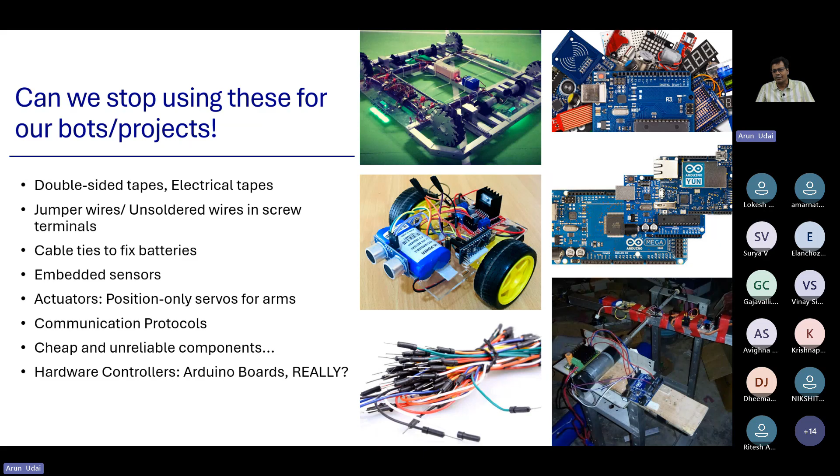Okay, so these are a few culprits. Hope you are listening, all of you are there. If a few of you can show me your face, it would be much better.

So where did you start basically, before UG? Before undergrad, where were you? Just check any nearby school level hobby competitions and science exhibitions - you were doing it before, right? Quite a lot of you. Hobby level science competitions and those exhibitions you all have attended, right?

So you see, even kids are making robots - in the front, what kind of sensor is this? This is ultrasonic sensor, yes very good. And then you have wheels, you have motors, right? And then you have a similar kind of maybe Arduino board or something. So that is a school kid who intends to make maybe an obstacle avoidance robot or a line follower, right?

That is very common at school level nowadays. If you go abroad, again you find Lego based line followers and kids play with that, right? Nearby at a science exhibition, I have been there as a judge and I saw there is a student in India - and there are many students who do this.

So this person is doing an exoskeleton, right? Links with the potentiometer joints. Joints have the potentiometer which can tell the feedback of how much angle that joint has turned. So each joint gives you the feedback of joint angle, and he can do forward kinematics or maybe using simple trigonometry he can find out where both his arms are, and he transferred those values to his motherboard which was an Arduino board, and then he had a motor driver on all the joints of the biped lying here, right? And that fellow used to replicate the motion that this fellow was doing, and this is a school project.

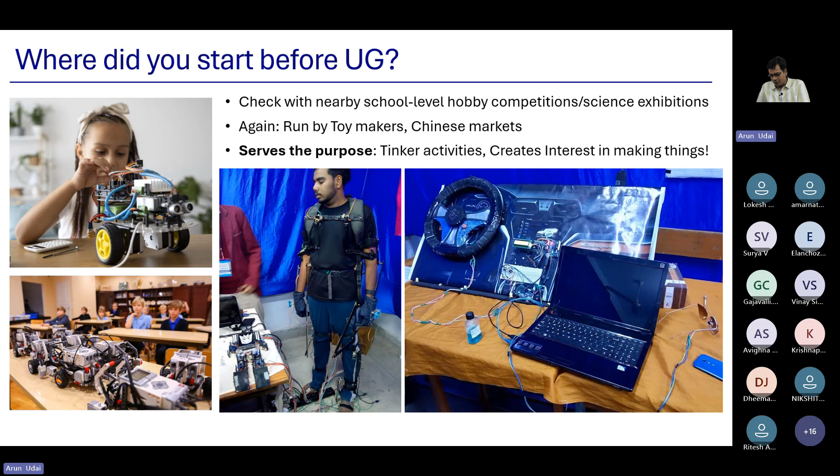Okay, so that is where we started before UG. It was good till school level. Don't claim that you are still doing UG level projects - definitely you are not, if you are doing this.

So these simple, clumsy bots - where does it lead to? These are all pictures from Robocon India, organized by Doordarshan. It's the biggest national level robotics competition organized. There are similar competitions organized by Technex at IIT Kanpur, Techkriti, Concetto at IIT Dhanbad, Srijan somewhere, and quite a lot of other technical fests. In all of them you've probably seen these kinds of bots.

Badminton playing robots, or soccer or basketball playing ones, and problem statements are given which favor certain outcomes. Actually these are all run by cheap Chinese businesses. The entire ecosystem is flawed - this is a big racket running in the background.

If this talk is going to be an eye opener for you - it ends up with your UG and PG. It should stop as soon as you start your UG and PG, after winning a few intercollegiate hobby competitions or final year projects. It will end there. In your lifelong career, if you go abroad for higher studies, or go to any industry and start doing real projects, definitely you won't look back to these models anymore, and it will become garbage for the school too.

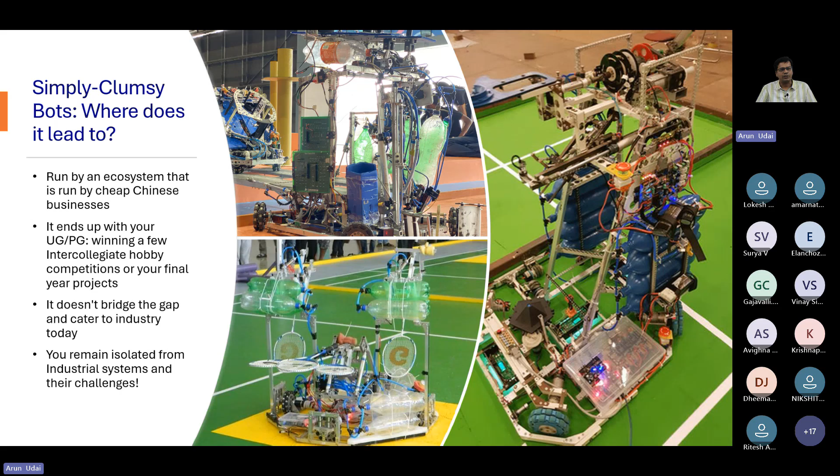You have managed to do it, okay, and you have wasted a lot of money. So what India cannot afford now is to make dear robots for entertainment, fancy research for publications which lead only to citations, nothing more - hotels using food serving robots, or any kind of Sophia as well.

If you know Sophia, she was given citizenship of Saudi Arabia. She was also given citizenship, passport. It's a mockery on robotics basically. It's just a speaking robot in the background. It uses some kind of AI or ChatGPT and answers your queries, and they are done with that. It was just a publicity gimmick for Saudi Arabia to boost tourism.

That is always there. Big countries with big money, they will keep doing this, but don't just blindly follow them. We cannot have that fantasy with our government's money. India is not that rich. They are not spending that much money into robotics.

You cannot afford to play guitar with a KUKA robot. KUKA robot is there at many places, even in the industry, sometimes in the academics. That is something around 25 lakhs it starts, and if my student comes to me and says I want to play a guitar, definitely it is not meant for that purpose. Probably I could have allowed it if I have hundreds of robots, few of them I can spare to do that. So even this as a project I have seen as UG at IIT Delhi.

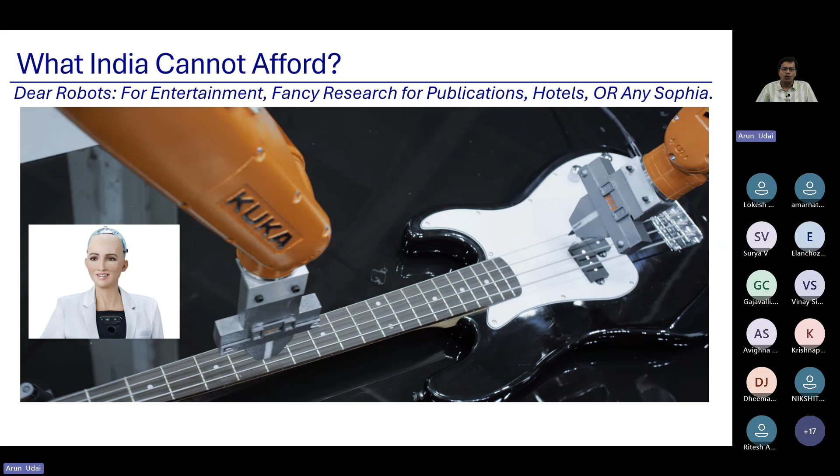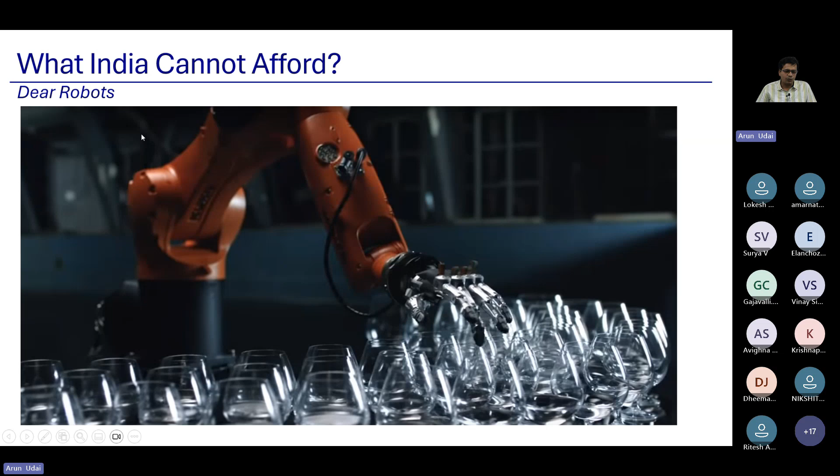What do they need? This is another example of a KUKA robot video which is there on the internet. It tries to tune glass bottles, a lot of wine glasses, plays a tune around that. So that again India cannot afford. That is good for Germany. It's a German video, fine. But this is not Indian, okay.

So robots are supposed to do 4Ds only, not the fifth one: dull, dirty, dangerous, and difficult tasks. Which work is a dull task? A repeatable task. The whole day, an apprentice in the industry may be doing one particular wheel tightening, tightening bolts of a wheel, 4 hours a shift, maybe 2 shifts a day, and that is a dull task.

Dirty may be a garbage cleaning robot - you want a garbage cleaning robot to replace the human who is actually doing it. It is dangerous also - dangerous task to defuse a bomb, maybe to defuse an IED, to face army's location at the front. Difficult task to use a payload capacity robot, if it is there, it is good. So these are the 4 Ds that we look for.

This is one instance from when I've been to Bokaro steel plant. This is not a video from that, it is from the internet though, so I could not record that video. This is the exact scenario, let me just brief it now. So this is what this fellow is doing - there is a bath of molten zinc.

Molten zinc over here, and this fellow is skimming this zinc bath. What actually is happening? There is a plate which dips inside this zinc bath and is raised up. It is a galvanizing plant, so a tin sheet is dipped into this bath and the tin sheet is raised up. So that surface of the tin sheet gets picked up by these small particles which are floating on the surface - these are oxidized zinc. So this is what he is doing, a skimming operation so that the surface remains smooth.

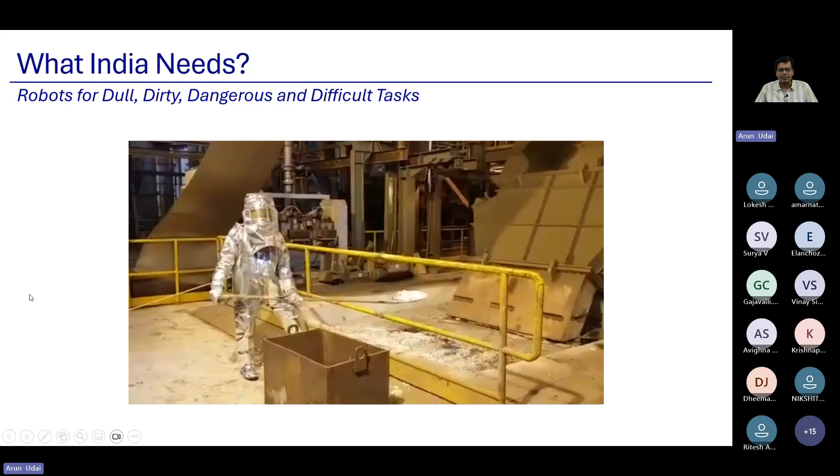And you know, this person cannot remain here for more than 6 months with a 4 hour shift every day, because he may have inhaled so much zinc vapor, he becomes unfit for his life. So that is what is a dangerous task, is it not? This is a steel plant's routine day-to-day job.

Next similar job is maybe this one. So how it happens in POSCO company, a steel company, it is done by robot. Same skimming operation is done by an industrial robot which safely does it. So this is what human replacement is all about.

When we talk about robots, they are going to replace humans. It is not AI which is replacing human. That type of human replacement was not desired, but definitely this is desired. So you have to choose, right? Where you have to go for human and where it should not be a human who is standing there.

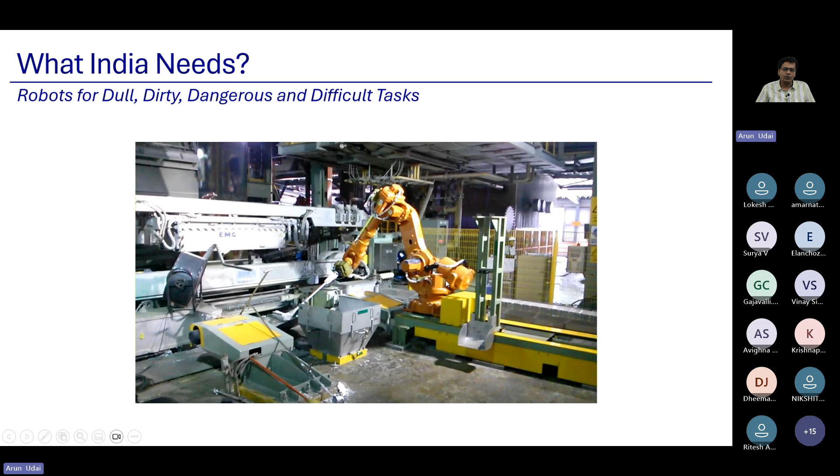So next similar job is a sampling job. Again, pouring a ladle, and this person with a huge spatula is trying to pick up a spoonful of molten steel, and he wants to take it for XRD analysis to get the composition, how pure it is, or what composition we are delivering with every ladle we pour. Again, fire suit, huge amount of vapor, high temperature, fumes, visibility issues, and it is very dangerous.

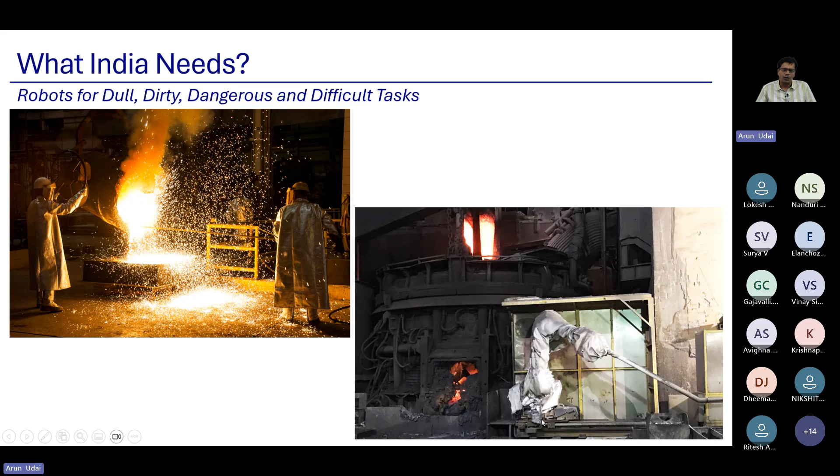And people are standing there doing their job only 4 hours a day. This is very bad. And you see, it is done by a covered robot abroad, again at Bokaro Steel Plant and other steel plants.

This is a similar situation with dump trucks at mines in Dhanbad, where I am staying. IIT Dhanbad, 5 kilometers from here, you will find this kind of used trucks. We are happy we have these trucks, Komatsu or Caterpillar, huge trucks. A normal truck standing next by shows you how big they are. These are run by humans, and there are drivers trained over here. So too much risk is involved.

So Caterpillar came up with a cockpit kind of trainer which does the job of training these drivers. They are not supposed to be put on the real trucks and trained directly. So these are training stations, which are robotic stations where people are trained how to drive such trucks.

In Japan, Komatsu is the company that has automated it thoroughly. You don't see a driver seat here. Before autonomous cars saw the day, this type of truck had already seen the day in Japan, Australian mines, and China nowadays. This is already in use. These are humanless, remotely operated, autonomous driving haulage trucks. That is already in place.

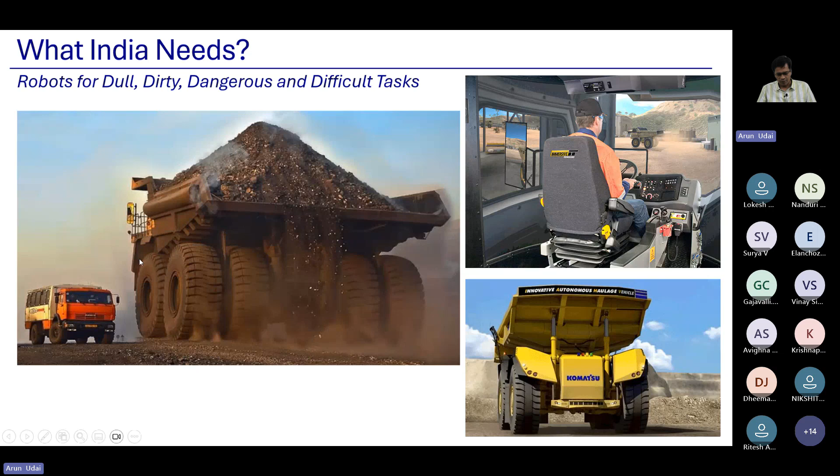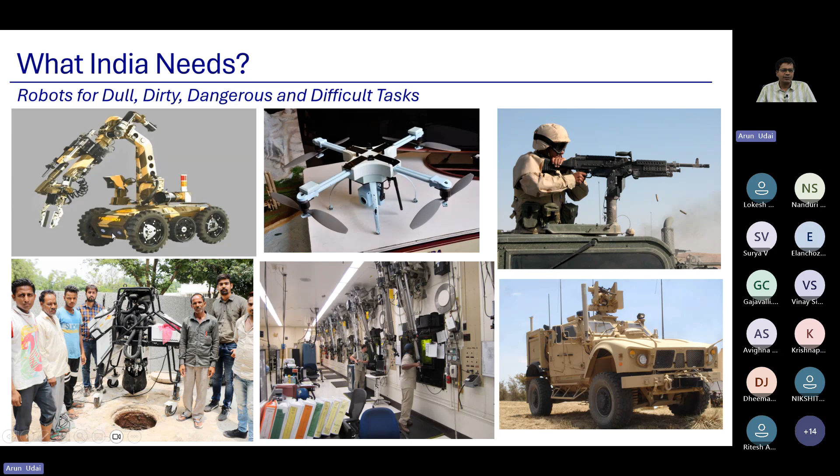So how did this all happen actually? Somebody has invested huge amounts of research, money, time, right? And then it came up. We need to invest in it there too. So this is the thing that we intend to do. So how to do it first of all?

You should start with engineering practices with alternatives. If you are using jumper wires, those are very unreliable. So what you can do is make your own jumper wire. You can buy these wires, just create a list. I'll share this presentation after the slides and ask the host to share it with you all.

This is the list of equipment and practices you should start with. These are good engineering practices for making any project, not just robotics. Not even a single thing is complete without electromechanical components nowadays, and it requires that. You don't see even automobiles, which were purely IC engine driven earlier, using these kinds of wirings now.

So create your own jumper wire, know the color codes, follow them properly. There are different strands, 1 square mm, 1.5 square mm. So maybe the picture is wrong, but yes, square wire, and those kinds of wires you can buy in a bundle. They're used to wire your house electrical wiring also. You know the stripping tool, but you should know this crimping tool as well. The center red one, and these are known as thimbles or sometimes lugs, widely used in industry. You just need to put them on one of these wires, crimp it, and make your own jumper wire.

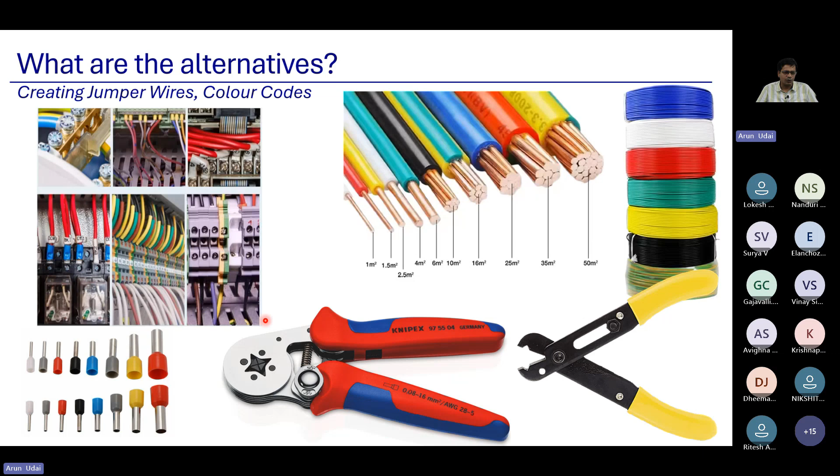So remove those 5 things that I mentioned initially from your life forever. If it is your lab, take it out of your lab, don't let it in. PCB holders, don't use double-sided tapes anymore. Maybe you can use DIN rail adapters, DIN rails. Behind you see there is a sheet known as DIN rails, on which you can mount PCBs, and it is the industry standard.

And PCB holders like this small plastic thing, sometimes you can get it 3D printed. 3D printers are there nowadays. You have PCB stands where you can put your boards, and the top red-bordered one is a product of my company only, which allows putting in your standard Arduino board, plugging it in, and using these screw terminals and these kinds of wires directly, tightened here to these screw terminals. That makes it a very reliable connection.

It should not use any jumper wire from now on, and it can be mounted on a DIN rail also. So this is a DIN rail mount with a screw terminal adapter for Arduino boards, supporting Arduino Due, Arduino Mega 2560. So definitely you can use such boards which support your existing tool set to an industry standard. This Arduino that you're already familiar with, you can use it with this kind of adapter board, and there are many. I've shown some pictures here. This could be the approach to fix your boards, rather than using double-sided tape.

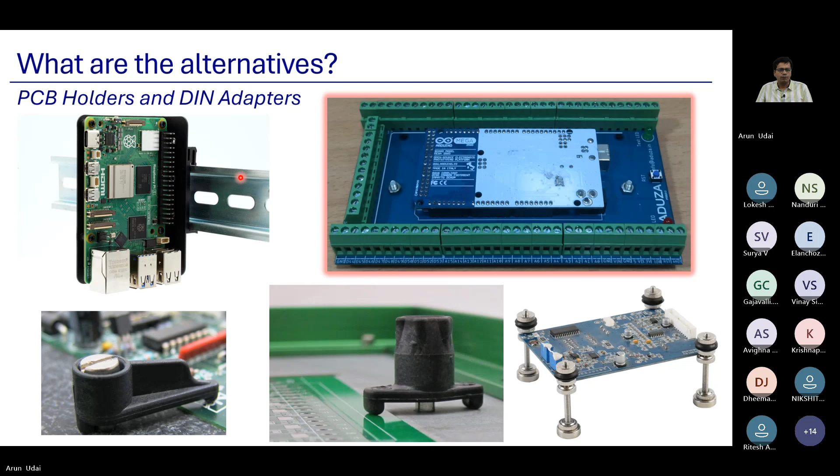Next comes the DIN rail. So this is what a DIN rail is. Behind this rail, this laser pointer is showing it's 0.035 meter, that is 35 mm width, and 7.5 mm height.

It is a DIN rail where you can mount different modular boxes available in the industry. Even this supports mounting on the DIN rail. These are terminal boxes, screw terminals, available one by one, in all different colors to color code your wires.

These are connectors, lever connectors. There are relays also, which may be mounted on these kinds of DIN rails. You see wire in, wire out. These are easy connectors with quick coupling so that you don't need to solder it.

You can have wires with thimbles which can be easily put there. You have shorting connections, the one which is here, which can get into all these holes. You can tighten them up so that wires are shorted. You want to create a bank of +5 volt, you can create that. You can create a bank of ground, a bank of negative connection. So all these are possible.

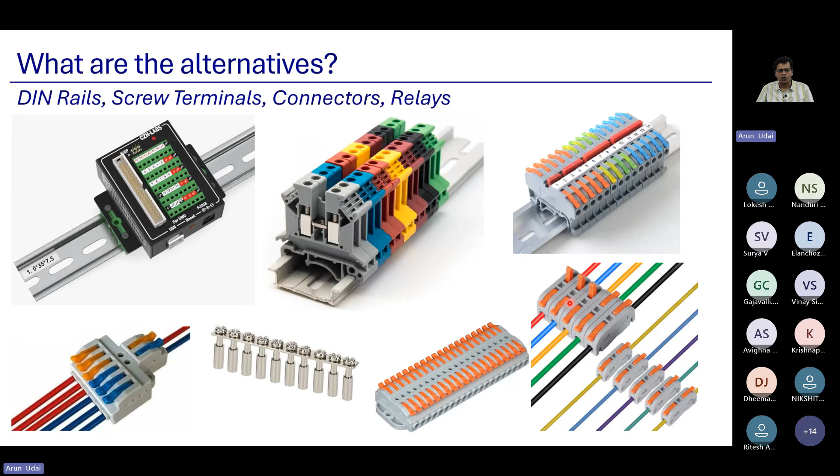Using these kinds of shorting connections, these are industry standard. All these are industrial standards. Try using these in your projects. Don't try to solder them with sellotape or something like that, not even engineering electrical tape. This is how you have to create your own DIN rails, screw terminals, connectors, and put your relays and everything. Next comes stacking up your wire.

You probably already know spiral wraps. How many of you have used spiral wraps? It clubs all the wire together using a spiral plastic tape kind of thing, and you can bring out wire from in between, and it keeps all your wires stacked up.

You can have conduits, a huge conduit which can carry a huge amount of wires also. All the wires need to be tagged and labeled so you don't get lost. You have left your project at some stage, the next intern may pick up your project from further onwards if the wires are tagged. Just the way we tag our source code in software, the same way electrical wirings are tagged.

You use cable ties to tag it further, and shrinkable tapes, these are known as shrinkable tapes. All the names are here, you can just Google around and see videos of that. Cable conduits, cable ties, this is a cable gland.

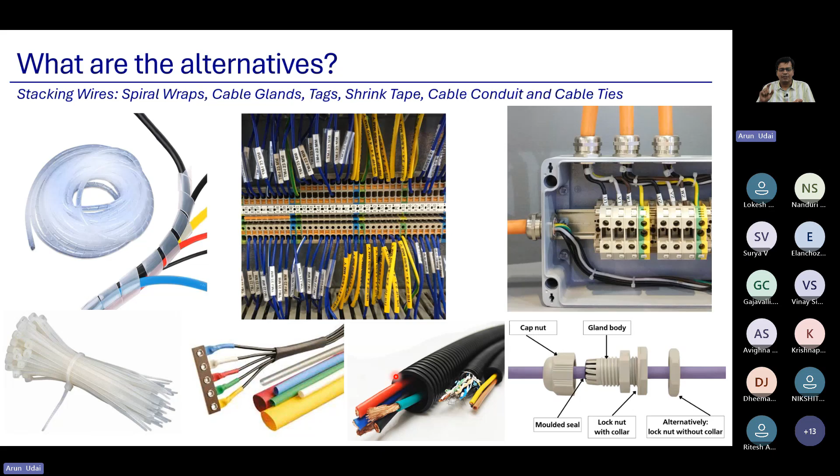So these are a few professional things which you should look for when you make your hobby projects also. You have to create a discipline now: if I do it, I'll do it in this way, or else I won't do it at all. I don't want to make a toy, I want to make products finally. So my project should look like a product. That is the first thing.

They are vibration free, and sometimes ingress protected, sometimes dust protected. Noise free, and it can work reliably for over almost 4 to 5 years guarantee they give, and it lasts for almost around 15 years or so. That is how they are made -- these are ruggedized industrial PCs. Configuration could be the same or similar, sometimes even much lower, but it doesn't matter as long as they are ruggedized.

It is industrial servo drives which runs all these servo motors. So industry normally they work on servo motors. They are nothing but motors with feedback which allows closed loop to operate. So servo motor, servo means nothing but a feedback operated motor. It can be stepper motor, DC motor, BLDC motor, or an induction motor also.

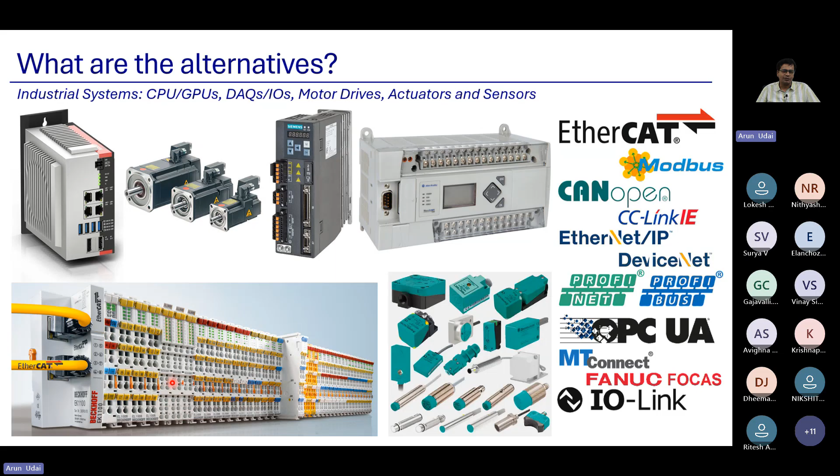Until unless you do this, so if at all you are setting up your lab, try to get these materials. Okay, robotics is a costly business. We are already spending a lot on fancy projects, so rather invest on these. They are not expensive. I will tell you now, these IO cards as compared to NI data acquisition device is 1/5 the cost, and it can work much better with open source. This Beckhoff EK 1100 costs something around 9,000 to 10,000. If you take a similar EtherCAT card, not even EtherCAT, Ethernet or a USB based data acquisition system, it will cost you more than 50,000 nowadays, the most inexpensive one, and that is what we are using in academics. USB data acquisition system of LabVIEW or National Instruments costs so much, and this is just 10,000, and it can do communication in gigahertz, closed loop gigahertz.

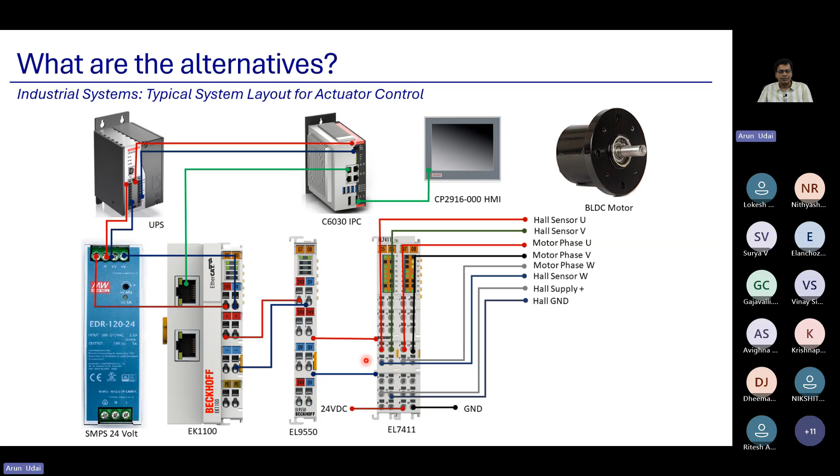So yes, that is where is the difference between academic system and industrial system. This is a brief eye-opener comparison. If at all we talk about workstation, desktop, PC, we don't talk below workstation nowadays, as if we are going to play a game, a video game, right? Definitely we can do both on a workstation, but industry runs on ruggedized industrial PC or customized embedded systems.

So we don't want any workstation PC to make our robot. Got it? After it is designed, you don't need it anymore. Even to design, maybe an NVIDIA GTX 1080 should be good enough. So don't ask for an RTX 4090, an i7 or i9 PC with 64 GB RAM. I'll tell you, don't worry. I know quite a lot of you don't agree with this.

Ruggedized industrial PCs are still running on Atom controllers, right? Celeron controllers, Pentium controllers, Pentium 1, 2, 3, and still it is on. Industry has not left it. Still i386 systems, and sometimes Intel i5 chips are quite common.

The highest PC you will see in industry will be i5, because they run dedicated systems with closed loop, fully under control. They are not operating on Windows OS. They have some proprietary operating system or Windows IoT version, not Windows 11 or 10. They work with real-time OS, VxWorks layer like Keil RTX, Lynx OS, mbed OS.

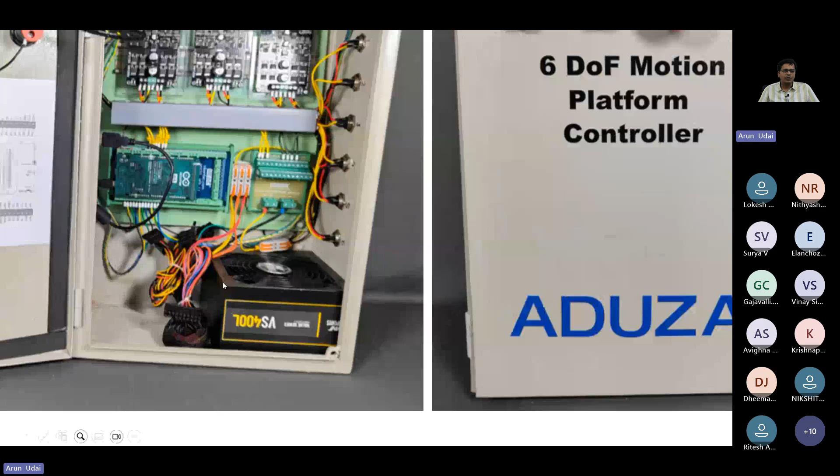So if you can see this, it has the same Cytron DC motor drivers fitted on acrylic, bolted and fitted on DIN rails, which you can see over here. These are 3 Cytron DC motor drivers, each one of them can run 2 motors. These are cable ducts which pass my wire from inside the cabinet to outside.

This is my Arduino Due board, which is held on a DIN rail holder with screw terminals. All the wires have thimbles, and they are tightened on the screw terminals.

You have a power bank, you have a standard SMPS. Gaming SMPS is quite good, right? So I have used that to generate 3.3 volt, 5 volt, 12 volt, minus 12 volt. All voltage levels are available in this SMPS. Mind it, for all projects you can choose such SMPS. These are very inexpensive, available from 500 onwards depending on wattage.

So CPUs have seen the day, it has already evolved over the years, that uses SMPS. Without using much of the wires you can get at least 12 volt, 3.3 volt, 5 volt easily with very good high ampere. 25 ampere current with 5 volt is available with this, with a 250 volt, 250 watt SMPS.

Okay, so these are Cytron motor drivers, Arduino, this is a standard Arduino board. So you see, this is how we made a 6-DOF controller for one of our robots that we delivered to IIT Jodhpur. These are industry grade switch, NO/NC contactor elements, fitted at the board top.

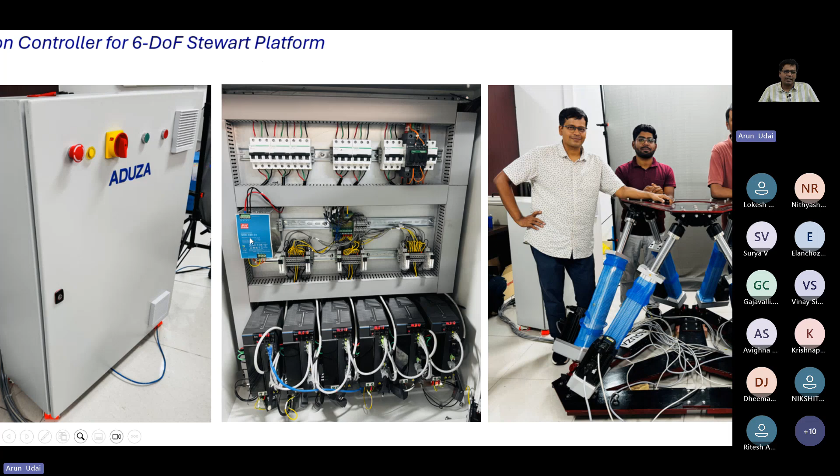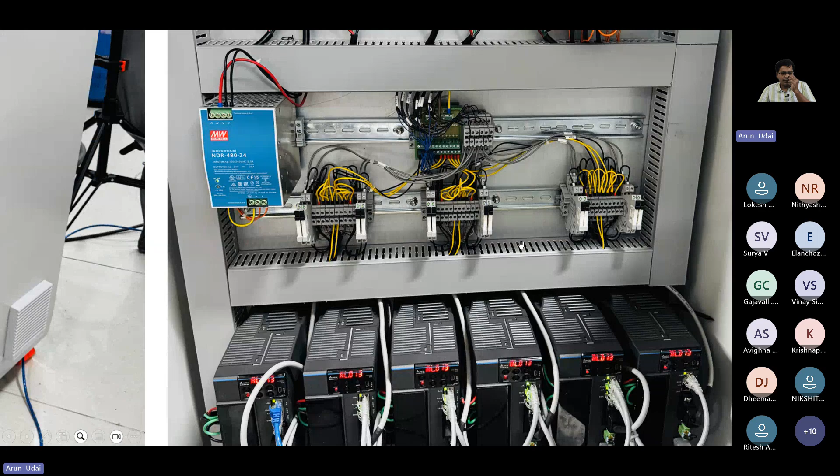Next one, we made it for IIT Madras. This uses industry grade, again DIN rail. You see, you have terminal boxes, you have MCBs, you have magnetic contactor, you have relays sitting on the DIN rail. This is SMPS 24 volt supply.

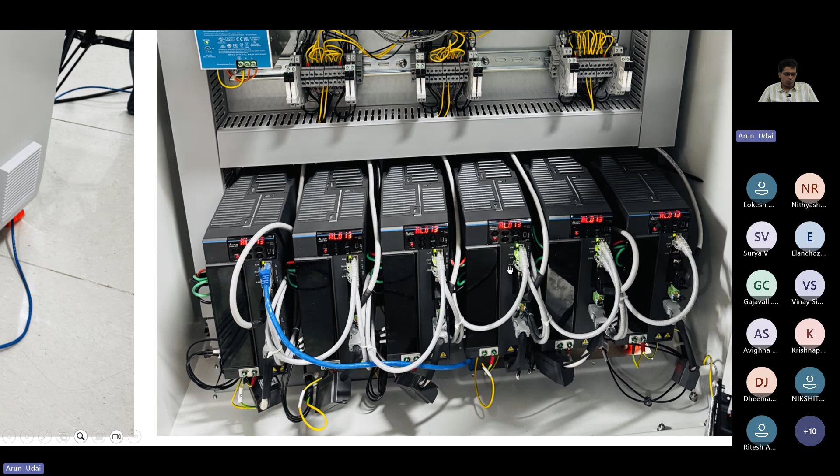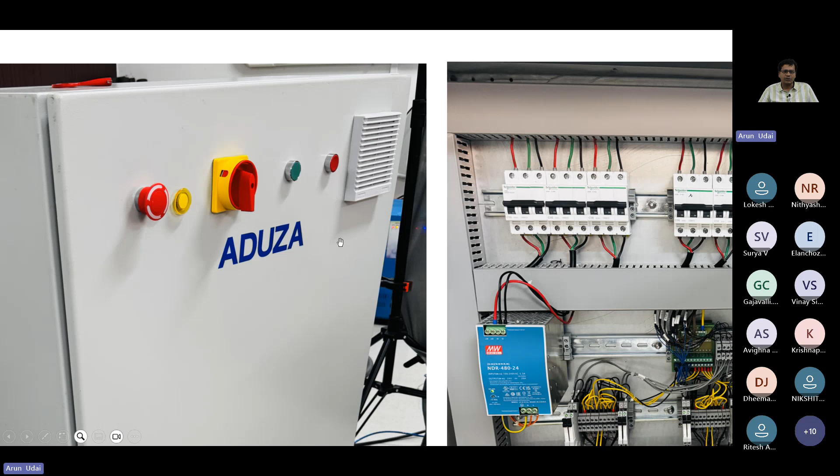These are 6 servo motor drives, VFDs basically, variable frequency drives for my AC synchronous motor which is there. And these are all the switches that you can see outside: emergency stop switch, push button switches, knob switches are there, fan vents are there for the fan, and finally it again looks like this.

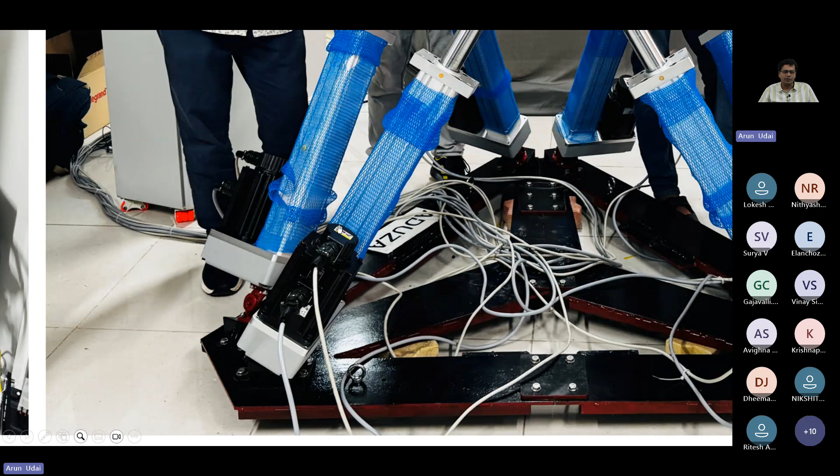You see, this is tall, standing like this. You have all the motors here. These are industrial servo motors with encoders fitted here. Linear actuators, fully customized, made in India from Genetics. This was again custom made.

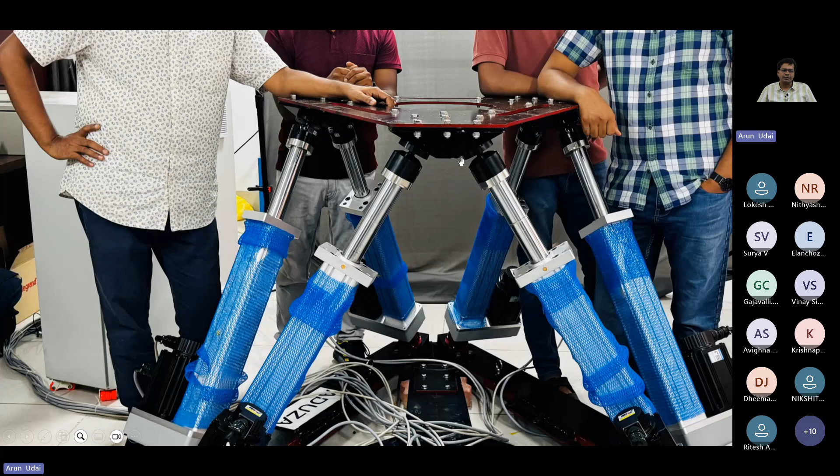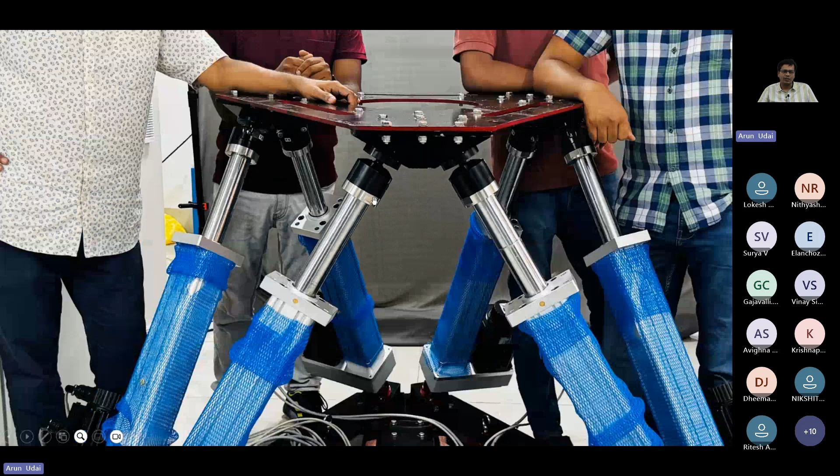All the plates are water jet cut and holes were done by CNCs. The top plate again is a single plate, water jet cut. These blocks, pillow blocks, all these blocks have CNC milling done on them. And then you have the gimbal, that is a spherical joint on the top, linear joint here, and that is how it was made.

Got it? So this is how we made our product here. So you can make products with industrial level tool sets only, not with any Arduino or those kind of wiring, those kind of tools, those kind of relays. So I started making things long back, I had a habit of making things with industrial systems. That is what has led me here.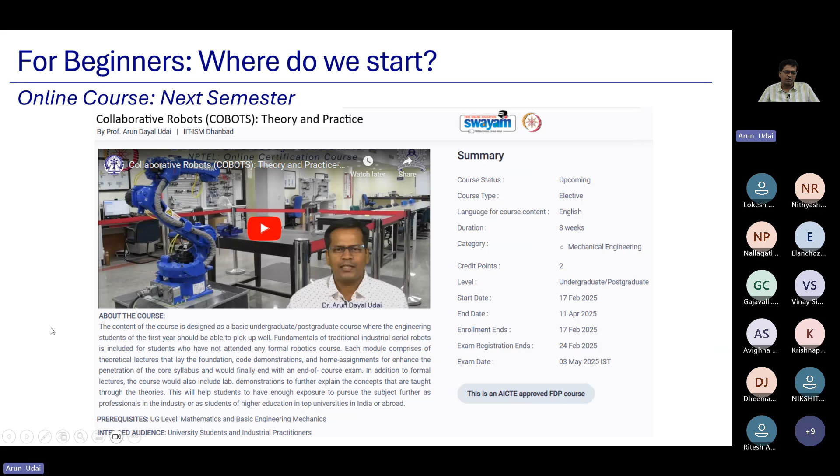So for now I'll end here for question and answer.

Just read these lines. Engineering is a discipline. Think like an engineer and talk like an engineer. Your words, your terms say what you are, how knowledgeable you are. Use proper technical terms to discuss with an engineer, not like a layman.

Don't say 'bring me that screwdriver' or talk like that. You have to say, give me a Phillips screwdriver of so much size, or an open-ended spanner, or a ring spanner. Name different spanners, name the tools. See and look like an engineer.

Engineers know what to see in a machine. They don't need to take a photograph of the machine - if they have seen it, the copyright has gone. You have to be thorough in what you observe in any machine. When you visit a place, you see what you have to see.

Look like an engineer. Don't wear slippers or half pants in your classroom. Look like an engineer. You have to wear a helmet, you have to wear a belt. You may have to wear a headset or a light, if at all you are in mining. So look like an engineer.

Your project should look like a product. Don't get limited by your stream or branch. You are a scientist first - when you took intermediate science, you were a scientist.

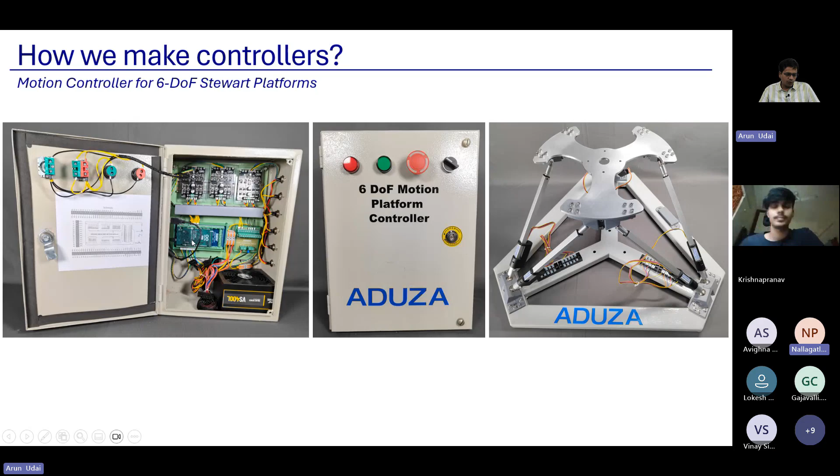In the previous image which you shown for the Stewart platform, you have used the Arduino for that, right? Were there any challenges you faced? Yes, many. I'll show you that one. This is the DUE board, an ARM processor, not 16 megahertz, not 8 megahertz, it is 84 megahertz. So the codes can run much faster.

I had 6 motors, all were servoed by me using my own PID loops. I had 3 Cytron motor drivers, each can run 2 motors, so the PID loop was closing all on this board. I had 6 PIDs all running simultaneously so that simultaneous motion can be given. So I needed a huge clock pulse for that.

For that reason I have used Arduino, and because of the project cost I have used Arduino here, or else maybe I would have used an industrial PC, or maybe Beckhoff or some kind of integrated input and output. I can use my own PC for that reason. PCs are very powerful, if you can use its real-time clock then you can control these devices in real time.

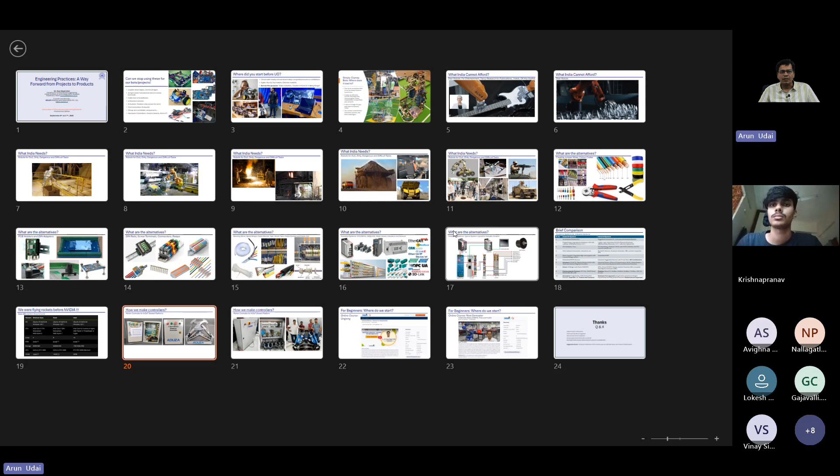Normally in the second project which I have shown here, I have closed my loop on my PC. So all the PIDs were happening on my PC using real-time clock. I have reserved the real-time clock, the 8 cores of my PC I had, so one of the cores I have reserved for real-time clocking.

How to do that? Actually I was using TwinCAT real-time OS layer over the Windows layer. So I had Windows and TwinCAT on top of it, that is a Beckhoff proprietary, and so I could create that. So these are some of the techniques to do real-time synchronous control.

There are videos on my YouTube channel. If you just go and type Aduza on the internet, you can see these videos. I don't have time to show you, so these videos will show you how they are operating, these two robots are there. Sure sir, I'll check them once. Hope I have answered. Thank you very much.